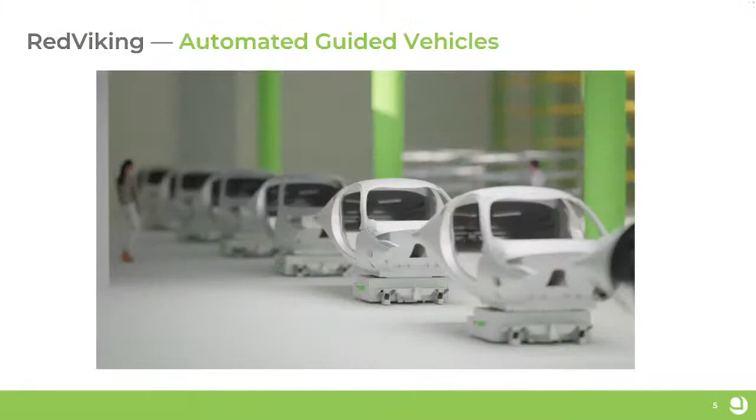Something that makes their products super unique is their automated guided vehicles that take our vehicles to be assembled around the factory floor to the different stations where they need to be assembled. They're basically robotic carts that the vehicle sits upon, and then it goes through our currently designed 12 stations to assemble an Aptera in just under 2 hours.

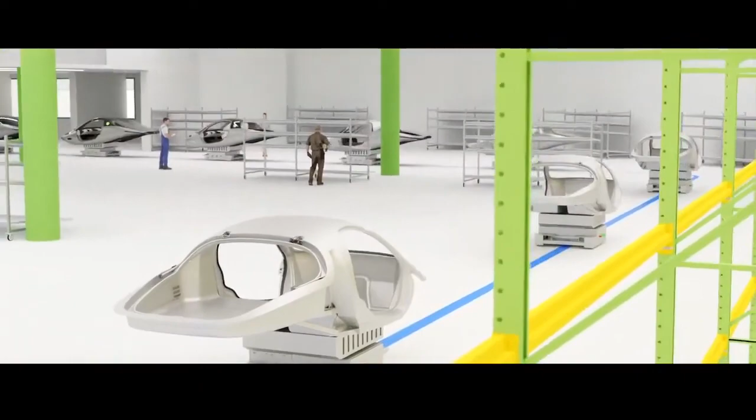But the cool thing about these robots is they can be programmed for different takt times. So in the beginning, if we're taking, say, 20 minutes per station, you can program the robots to move 20 minutes per station. And then as we speed up to 15 minutes to 10 minutes, the vehicles can just move faster.

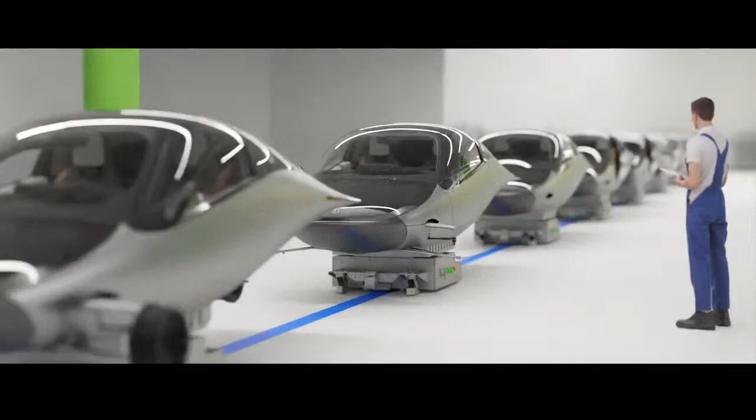And if there's a problem on the line, say a part gets installed wrong or a part ends up broken, you can have the robot take the vehicle off the assembly line, go over to a repair station, and when the vehicle's ready again, it can move it back in the queue to be ready for the next assembly operation. As we grow Aptera and have more Aptera variants, assembly times may vary between the variants.

As we get into maybe bigger or different vehicles, these carts are really adaptable over time. So it's not the traditional automotive plant that has overhead gantries that you have to install that cost millions and millions of dollars and aren't very flexible.

You've heard of factory changeovers in automotive past where it's taken a factory almost a year just to change over from one line to another. And that's because all of this equipment has to be installed, and it's very expensive and very cumbersome to uninstall and ramp up to a new and different kind of automotive line.

For us, it's really just changing the programming of the robots, how the robots move through the factory. So it's been an amazing relationship, and I think Pablo's been very happy about how the manufacturing floors come together with RedViking.

We actually, before we go into powertrain, have an exciting video to show you regarding the factory and the way that it will flow in the facility.

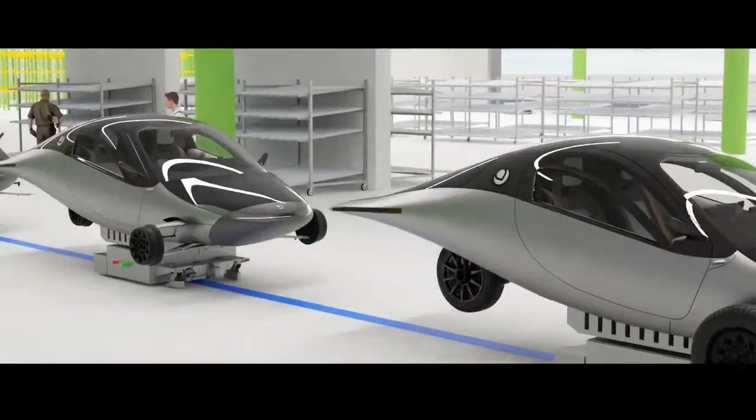We're back. Wonderful.

All right, as we're going through the different systems of the vehicle, Chris, would you like to talk about powertrain?

I would, and I'm sure Steve can chime in too. But we've had amazing progress with Elaphe Motors in Slovenia. Steve, myself, Akash, and Pablo traveled over to Italy and Slovenia and had an amazing trip with those guys. They are scaling their manufacturing capabilities to meet our production needs now, and they'll be delivering those motors from Slovenia to here in the U.S. for us to assemble these amazingly efficient motor packages.

I find myself having lots of meetings with investors and people interested in Aptera, describing this powertrain system and the power that it gives Aptera. It's just simplistic. The motor is in the wheel. You get rid of a centralized motor and a transaxle or a gearbox. You get rid of U-joints. You get rid of drive shafts. It's more aerodynamically efficient. It's more efficient at speed. It's just an amazing thing that makes the Aptera even more efficient.

And I think we're just so grateful to the team at Elaphe for helping us bring this to reality and bring this to the masses, because I think this technology will make the world a better place, because it'll make vehicles more efficient. So happy that arrangement has progressed nicely, and we're starting to push on all the gears.

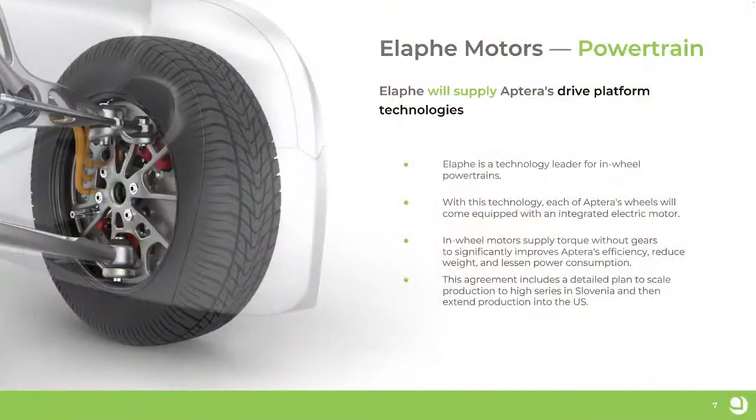They're buying equipment. They're rehabbing facilities. It's a joke, there's no gears. He said push all the gears.

So anything to add to that? Yeah, we made the introductions, but as Chris said, it's a team, right? It's Pablo and the engineers who are working with them to make it happen. One of the things I'm super excited that they're doing, besides modifying the motor to physically meet our needs, is the work that they're doing to make it more efficient with the windings and the shape and everything of the wire. And that's going to be a significant step function above where we are now in terms of the motor losses and efficiency. So I'm really excited to get these new motors.

Great. All right, another exciting area of advancement for us at Aptera, battery.

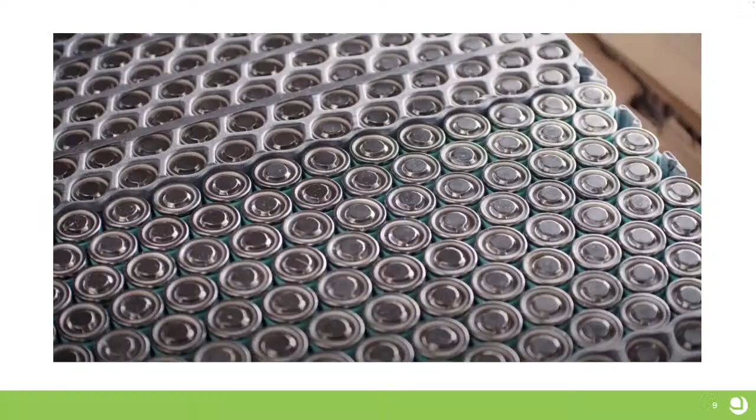Yeah, our battery team has been doing amazing things characterizing our 2170 cells, not just individually, but now as modules and a pack. It's been really cool to see the thermal characteristics of the pack design that we've come up with. It's just been amazing, and it's really cool to see kind of the equipment and processes come together to bring this pack to life.

It's amazingly energy dense, and our first pack design that you saw a video on a couple weeks ago, our 41 kilowatt hour pack, 45 kilowatt hour pack, 41 kilowatt usable, is just, it'll be an amazing first offering for us, and it'll be really cool to see those vehicles rolling around.

We will deliver the 41 kilowatt hour battery pack first, and then we'll deliver the 250 mile range, then we'll deliver the 600 mile range, and then we'll deliver the 1,000 mile range after that. So that's kind of the staging order of how we're delivering these battery packs.

That's exciting stuff. And an amazing relationship that we formed along the way designing this battery pack is with Eve Energy. They're going to be one of our battery cell suppliers. They've been very helpful in cell characterization over the last few months. And we've been making battery modules and packs with their cells that are going through validation now.

They're giving us 2170 NMC cells. The specific NMC chemistry is called 811, but if you do your research, it's a very energy dense chemistry that works perfectly for our needs and gets us tons of range and tons of energy density, and is kind of the latest and greatest in the battery world.

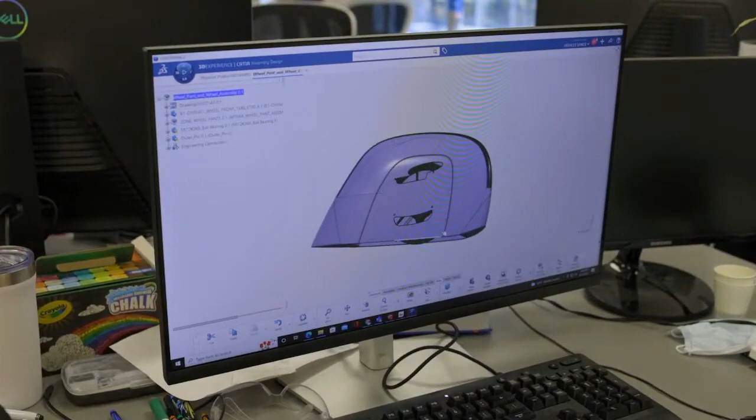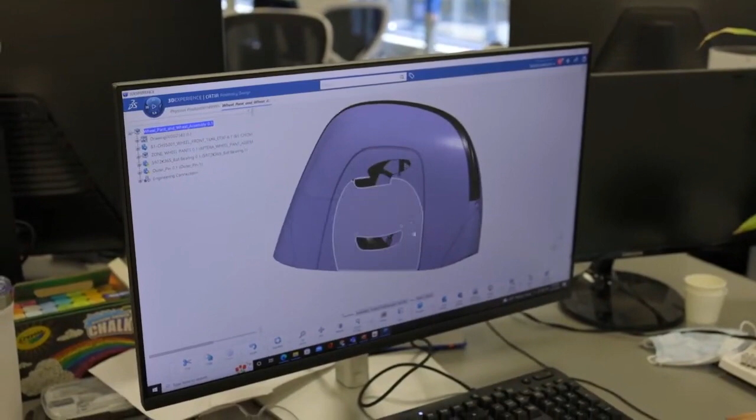Here you can see an updated CAD model of the wheel pant. At the front and back, 20 millimeter thick ethylene vinyl acetate foam bumpers allow it to take impacts. At the top is a plastic structured lens. On the inside is the plate that mounts to the spindle, and then a wheel pant in sheet molded carbon with an inner liner, permanently bonded together. And what happens when we go to simulate it?

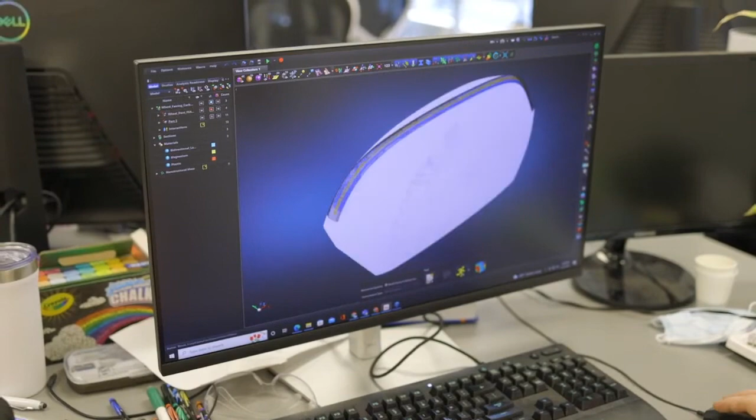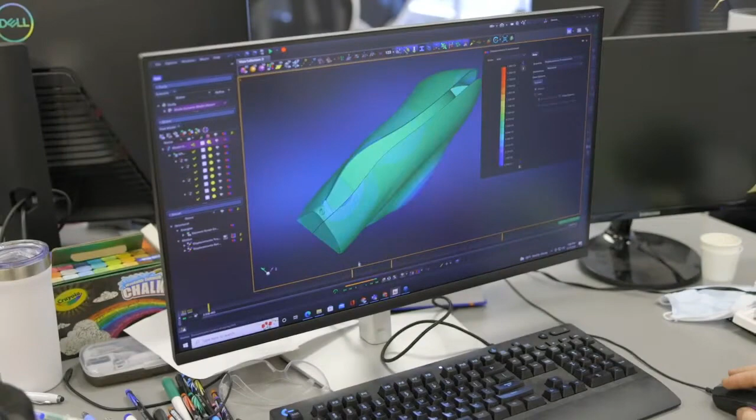Well, we have a model of approximately 800,000 elements, which when run with the SMC laminate and a plastic lens, gives the following modal results. This is equivalent to putting the component on a shaker table and allowing it to run at various frequencies until it shakes, giving you the resonant frequencies of it.

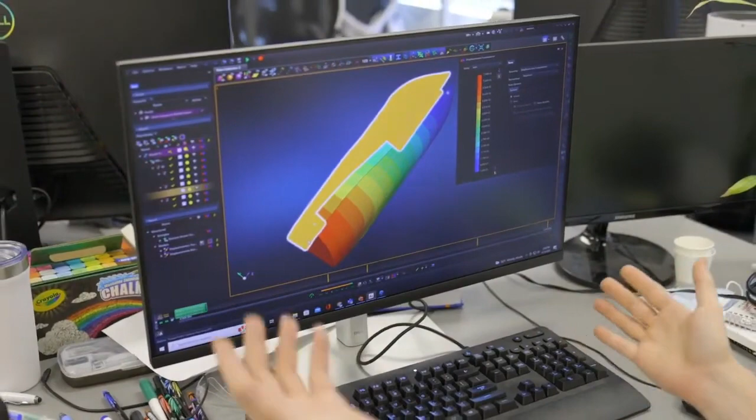The first few modes are trivial. Since it's unconstrained, it could drop or spin in any direction. The first non-trivial mode is the outer of the wheel pant bouncing in and out. This is restrained by the outboard bearing, but it occurs at 77 hertz, which is above the target.

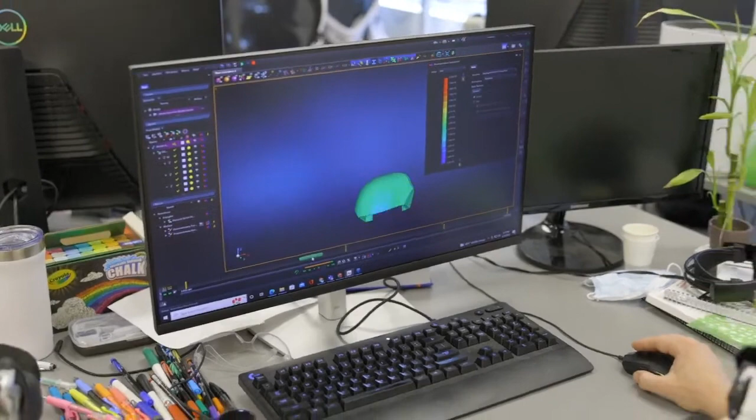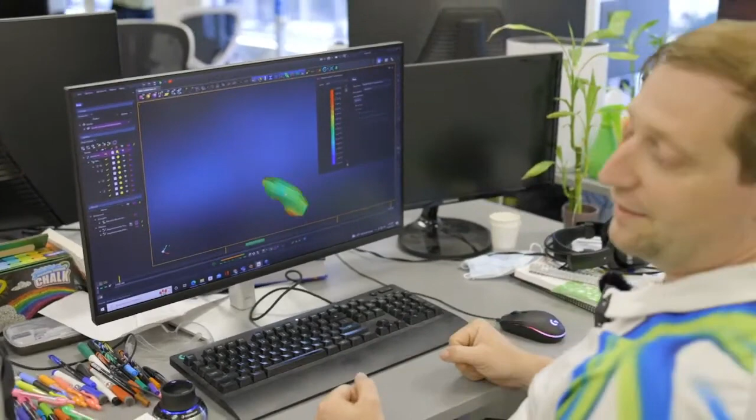Next you see the 100 hertz motion where the entire wheel pant is involved. This is effectively the first true resonant frequency of the part. If we could go about 225 miles per hour, we would run into this mode, but we're limited to 110.

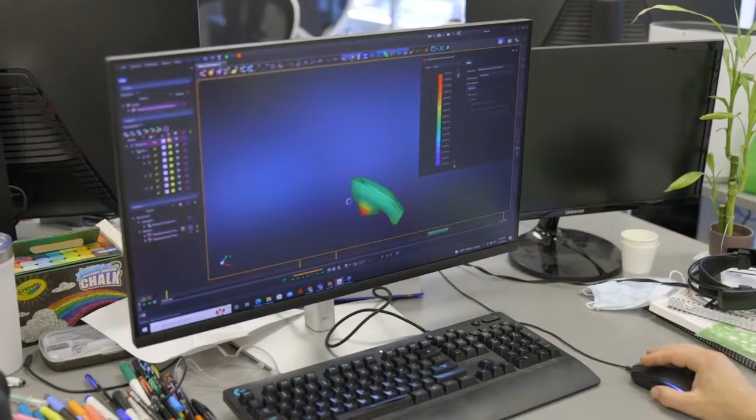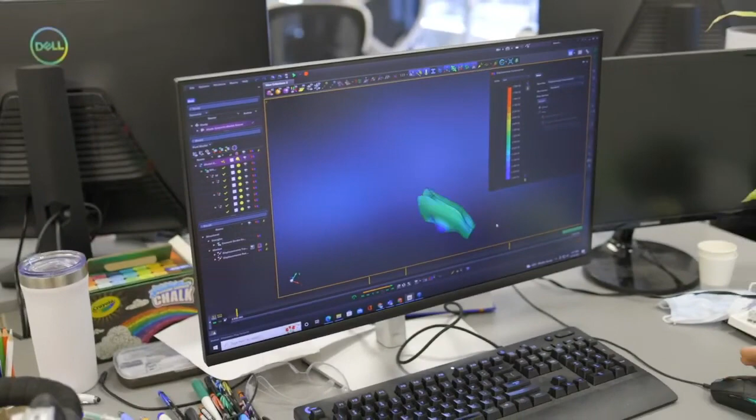So there's a considerable factor of safety as far as not having your entire wheel pant shake as you drive. The following modes beyond it are more local, with compression of the lens and the back, and a global mode where everything is vibrating, showing that this wheel pant meets the stiffness requirements we set out to meet, providing an experience where the aerodynamic shape of your wheel cover doesn't change and doesn't cause weird reflections in your view as it shakes.

I hope you enjoyed that, and in the next phase we will continue development on the lighting and on the mounting between the inner and outer, then proceed into prototyping, tests, and later production. Thank you.

Okay, now we'll pass it over to Steve Fambro to talk to us a little bit about body controls.

Thanks. By the way, some of the feedback from the live chat is, what are you guys drinking, cocktails and whiskey early in the morning? I assure you it's not. It's Celsius drinks, we're addicted to them, they make us very productive. Caffeine is key.

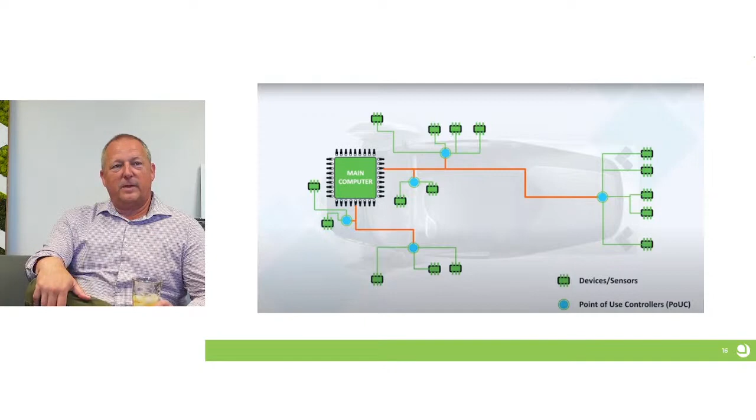One of the things Aptera is doing different with body controls and wiring is we're minimizing the amount of wiring the vehicle uses. We're able to do that through a unique architecture we've developed called the PoUC, Point of Use Controller. They're very small, low-cost, simple controllers that we sprinkle around the vehicle. They handle the loads of sensors, lights, switches, relays, and things like that locally, so we're not routing big wiring harnesses and lots of connectors all over the vehicle. The net result is the wiring harness is smaller, weighs less, and has fewer connectors and connection points, which helps us deliver on efficiency.

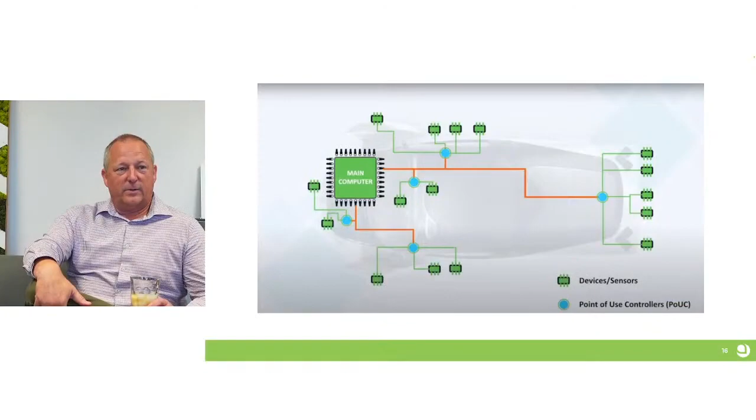I'm amazed at some of Sandy Munro's teardowns, where you see them pull the wiring harnesses out of some vehicles and you're like, oh my, that's a lot of copper. 90 plus pounds in some vehicles, and we can get it down to 30 pounds. That's an amazing weight savings.

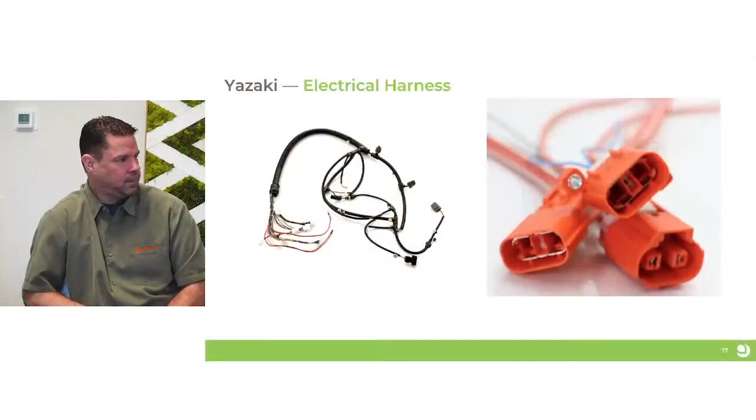One of the things we've announced a short while back is our relationship now with Yazaki. They're helping us with those newer, smaller wiring harnesses, to the extent that they've even got their engineers here embedded with us, helping us deliver on that promise and have these harnesses ready for production. Yazaki's in half of all new cars sold, so they're an amazing company with amazing reach, and it's very cool that they're willing to help us get this vehicle into production the right way on the wiring, harness, and connector side.

Thank you. And I believe we have JC to tell us a little bit more about how the electrical system in Aptera will work.

Oh yeah, awesome. Thanks, JC. So hi, I'm JC, I'm a firmware engineer here at Aptera, and I'm going to show you our low voltage test bench.

This bench basically represents all of the body controls that we have. Body controls are things like the window motors, the door latches, and different kinds of lights. This table is set up to enable us to program those components and watch how they interact with each other so we can debug and figure out how the system would work in the real vehicle.

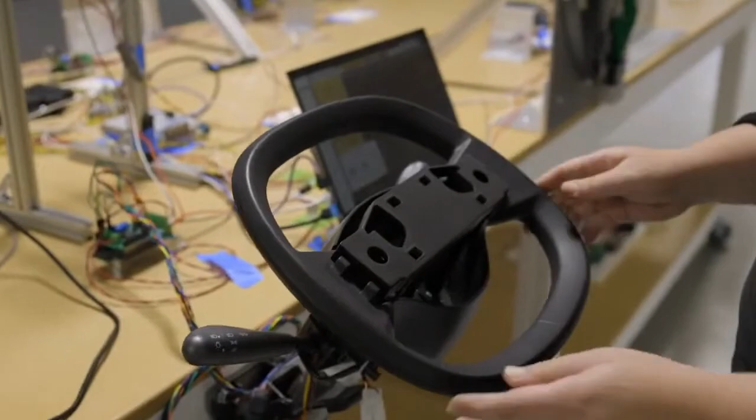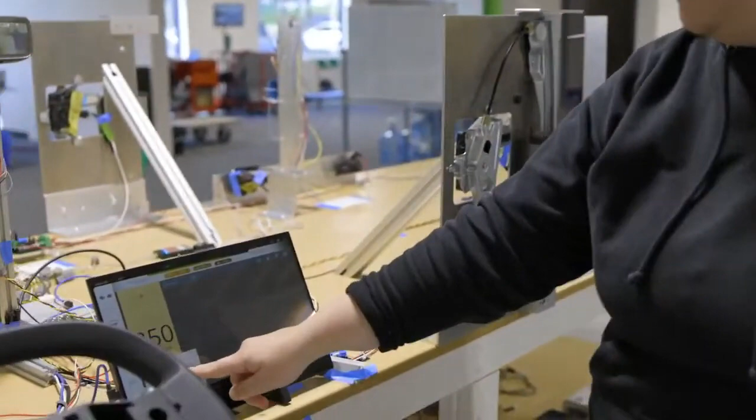Right now, this is where our wheel is, and above it you can see we have a rear view mirror with our video feed live from behind. We also have windows, well, fake windows with weights hooked up so we can test out the infotainment, where if you push up, the window should rise, and down, the window lowers.

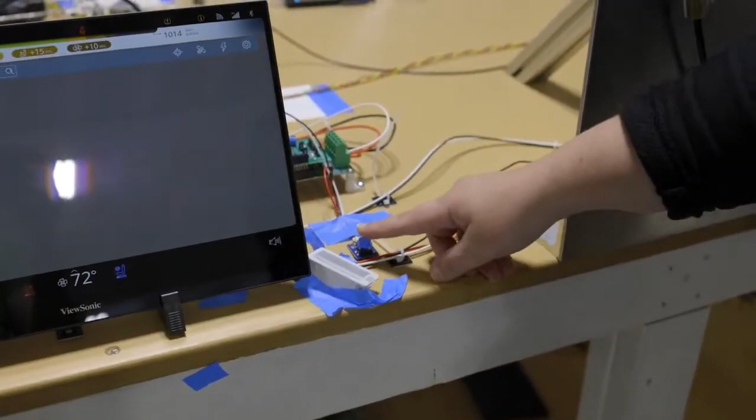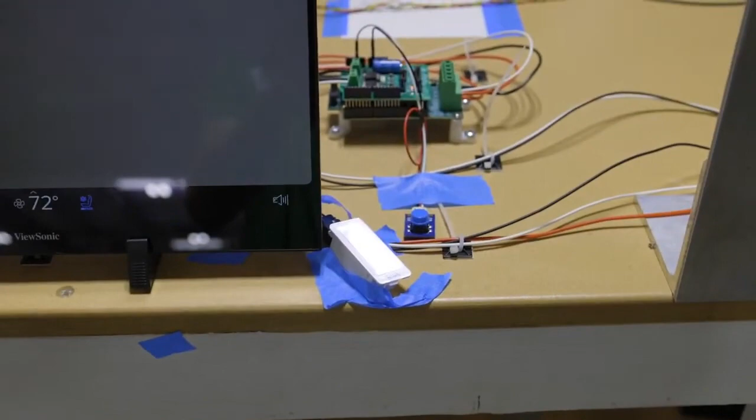This button simulates the button that would be in the vehicle to open your door, and when I press it, our left door latch opens all the way. When our left door latch opens, we get the wheel well lights that would be down at your feet when you're in the vehicle so that you can see where you're getting in. And then when I close the door, the lights will go off.

We also have the blinkers hooked up in the back of the vehicle so that we can test our signal patterns for turn signals, as well as test our hazard button lights.

We also have a pretty unique way of getting into the vehicle. We have two different methods for unlocking the door and getting in. The first method is an RFID card that you would have, where you pull it out of your pocket and then tap it against the door, and it will authenticate that it's you with the card and open the door for you.

We will also be having an app where you can authenticate who you are via Bluetooth. And then whenever you want to open the door of the vehicle, you can just walk up and knock on the B pillar twice.

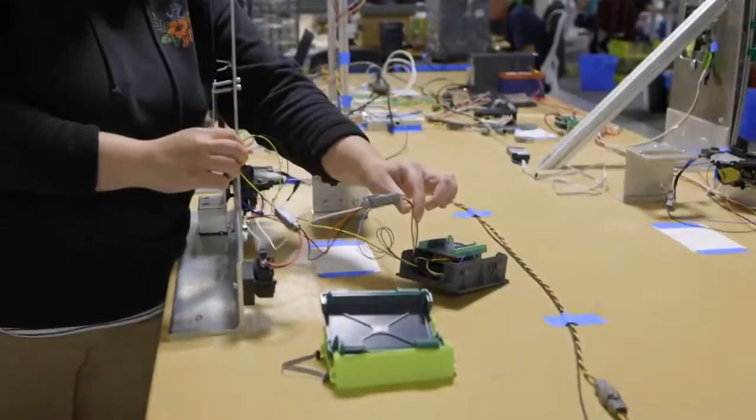The main goal of Aptera's body control design is to minimize the complexity of the wiring harness. In most vehicles, you would have all of the wires that you need for body controls, like the motor wires and the ajar sensor wires, and all of those would go towards a central computer. You have that from every single point on the vehicle, so you end up with quite a lot of wires.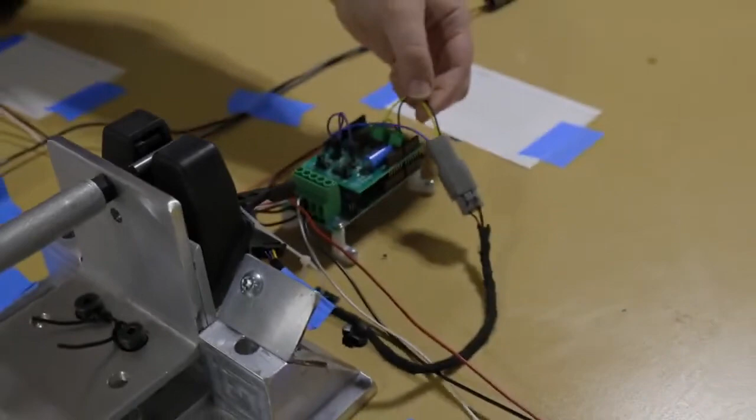With Aptera's design, we have smaller control boards that are located in the area of the controls they drive. So the door controller is going to be located in the door, and the rear hatch controller is going to be located in the rear hatch. This way, we can take all of these wires that come from the rear hatch, process and control them, and then we only have 3 wires total running from each location back to the central computing system.

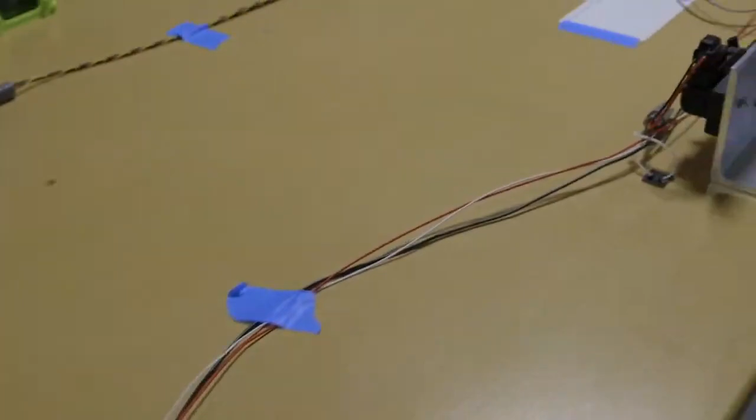Well, as you guys all know, the sun is Aptera's superpower. So to give us an update on solar, Steve. Thanks, Sarah.

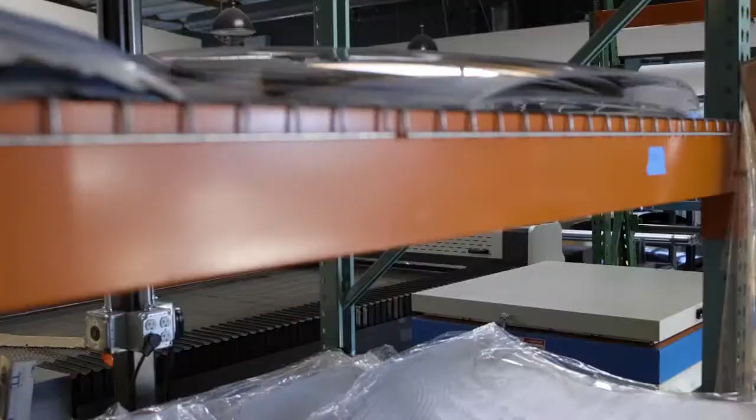When you're a solar electric vehicle company, it's not surprising that one of the largest parts of your technical endeavors is going to be solar. To that end, Anuj and his solar team is one of the largest single groups of engineers here at the company, and I think it's the largest single IP generating group. There's about 50 patents either filed or in play just with solar alone. We have in-house patent counsel who Anuj and his team keeps very busy. But they're also working with batteries and composites and suspension as well. Solar takes up the bulk of it.

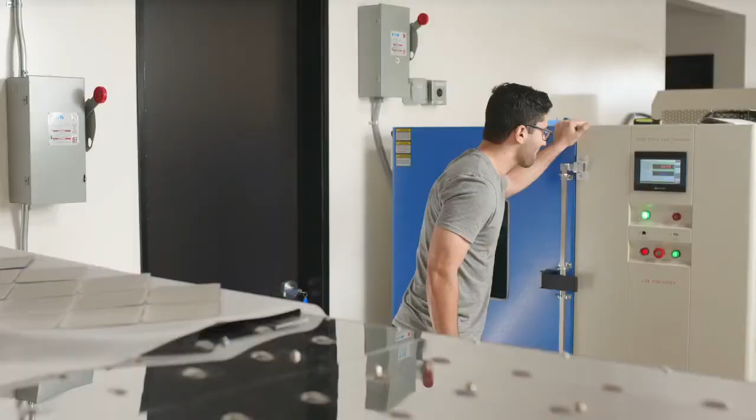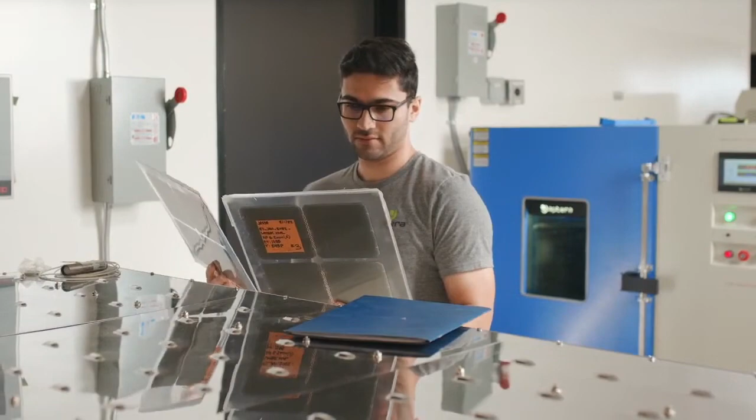It became apparent to us that it couldn't be a thing we simply thought of as an afterthought or did in any half measure. Rather, we realized early on that we had to go all in and double down on our ownership of solar, from working directly with the cell manufacturer to raw material suppliers all over the world, special test equipment manufacturers and equipment manufacturers to help us make these very unique compound curved solar panels.

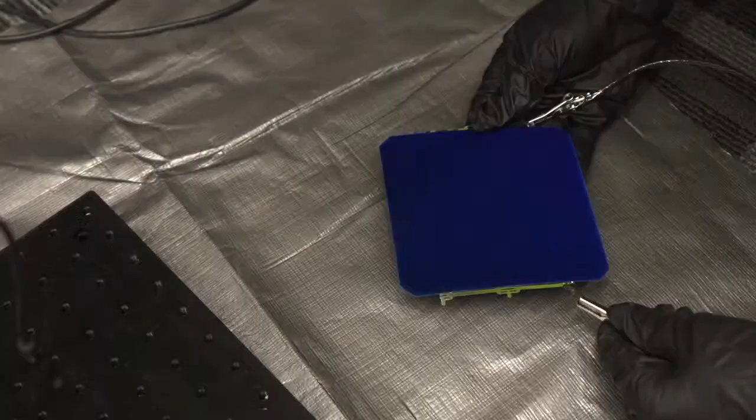Anuj had to build a team that could understand all of the material science and longevity issues that plague some other solar panels, and work to address those, and design an extremely lightweight, curvaceous panel that can have a 20-year lifespan. We have all the tools inside the company: test chambers, all kinds of solar torture equipment, from ice guns that they've made - apparently our team is good at making ice guns - to a simulated sun, which is a large 20-foot tower in an enclosed chamber, to a humidity and temperature chamber, to really simulate 20 years of life of the panels. We now have a very good understanding of what makes a reliable, productive panel, and that's what you're going to be getting in your solar-powered EV.

I think Anuj has some video for us. He does. Okay, it was playing the whole time. Oh, okay, good. All right.

All right, what did you guys think of our video? Solar is a big part of the company, and there couldn't be any other way to do it. I think it's amazing to note that when we first started testing the first solar panel 2.5 years ago or so, we kind of put it in vehicle configuration to try to figure out how much energy we would create.

We looked at that and thought, okay, hopefully we can find somebody to build these solar panels for us. We learned very quickly that even the best solar experts in the world weren't going to be much help in making automotive grade solar panels. So we started very early on with Anuj and his team, knowing we've got to own this challenge and make the world's first automotive grade solar technology.

It all begins with a focus on aerodynamics. As Aptera gracefully pierces the air with its curved nose, wide body, and tapered trunk, it uses less than a quarter of the energy of the average EV on the road today. While our unique shape may seem like a design statement to some, this is no accident. Our ethos of continuous improvement has pushed us to constantly refine the shape of the Aptera to reduce the force of air flowing around our vehicle while in motion.

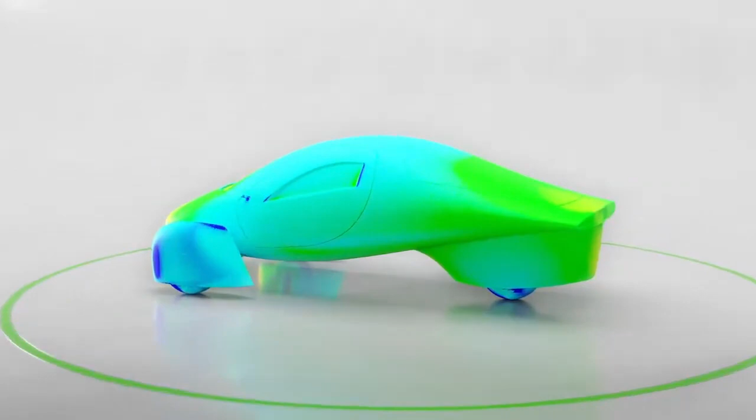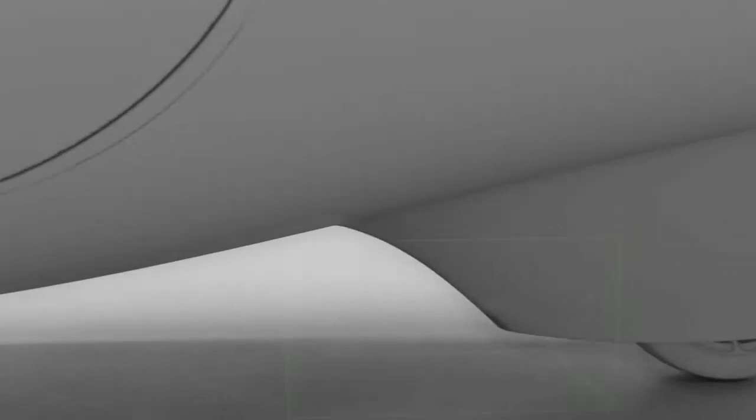This has been done with aerodynamic iterations from our talented Aptera team, alongside tools provided by AirShaper's Aerodynamic Shape Optimization platform. First, we adjusted the shape of our front wheel covers to align with the natural airflow pattern around the nose and main body of the vehicle. Next, we focused on the rear wheel skirt, shaping it to aim the air downward and away from the rear tire, so that a process called pressure recovery can occur as the airflow pushes the Aptera forward, like it's squeezing a wedge with the sides of our rear wheel skirt.

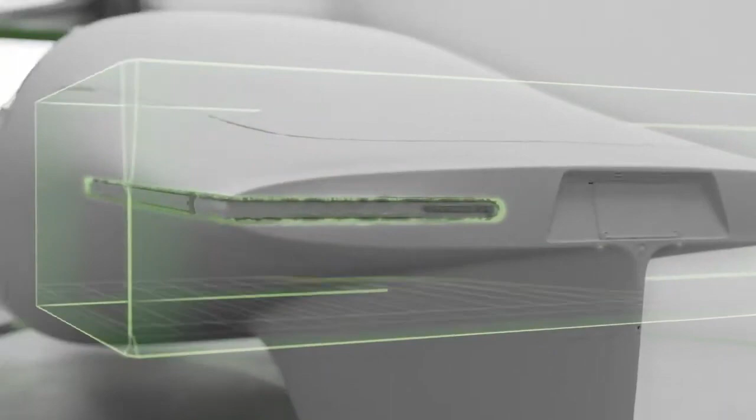Lastly, by reducing the thickness of our tail, we reduce the wake behind the Aptera, so it literally drags much less air along with it. All of these ultra aerodynamic updates mean the Aptera can achieve the greatest level of efficiency, refueling from the sun as it drives. With our dedication to continuous improvement in all areas of vehicle engineering, we're eager to find new ways to reinvent transportation. We hope you'll support our efforts at aptera.us.

All right, that was a super cool video. Chris, do you want to tell us a little bit about what we saw there?

Yeah, I hope everyone enjoyed that super sexy video. It's amazing to see the transition from alpha to gamma, and it was really a lot of work from our dedicated team here to refine and massage the shape. It's just amazing the computational tools we have at our disposal. We can do full aerodynamic simulations for the whole vehicle now in like four hours, and some of those generative design studies overnight. So it's really cool to tackle an aerodynamic problem, have your own ideas on how you think it might be solved, and then have the computer tell you no, that's not how you're going to solve this problem.

This is how you're going to solve this problem. So I think it's great to have artificial intelligence telling us how to make this the most aerodynamic shape possible, and it's shaved a lot of energy usage out of our equation.

We actually grew the body by 1% to make it bigger for the passengers. We have more headroom, more interior room. But we actually decreased the total drag coefficient of the vehicle several percent because we've been able to go through this drastic optimization cycle to make this better. I think we'll continue to do that until production, and we'll shave every little bit of aerodynamic drag out of the equation we can.

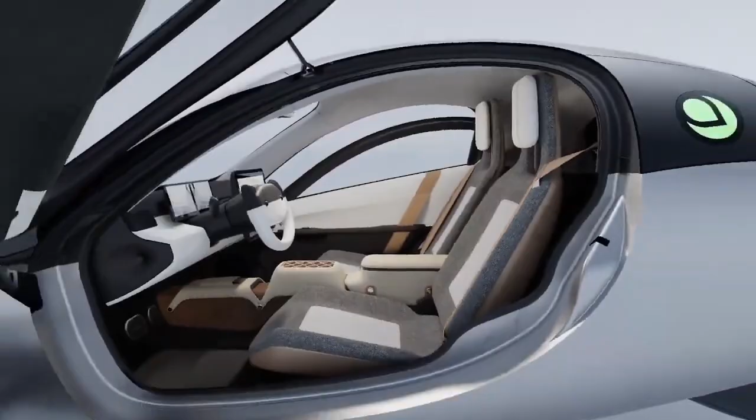Okay. I'll get that working for you. Okay, thank you. All right.

Okay, Jason, I think we're going to go through the interior. The center of your world when you're in Aptera - could you walk us through what that experience is going to be like for drivers?

Sure. So the whole starting point for Aptera, inclusive of our aerodynamic product, is our user space, which is basically the cabin of the vehicle. We've endeavored to give a unique experience that is commensurate with the unique outside. The interior has to be executed in a similar way. So we looked at what are the essential needs: comfort, safety, material experience, fit, finish, feel. And these all came together in what you're seeing now.

And again, we're going to have a physical representation of this within about 4 short weeks. I'll start with the seating position. We've optimized the cabin to increase the space. As Chris mentioned, we grew the body about 1%. We've optimized for ergonomics and reach envelopes. We've got the right H points, which is where your hips are, and the right reach envelopes to the steering wheel, to the center screen.

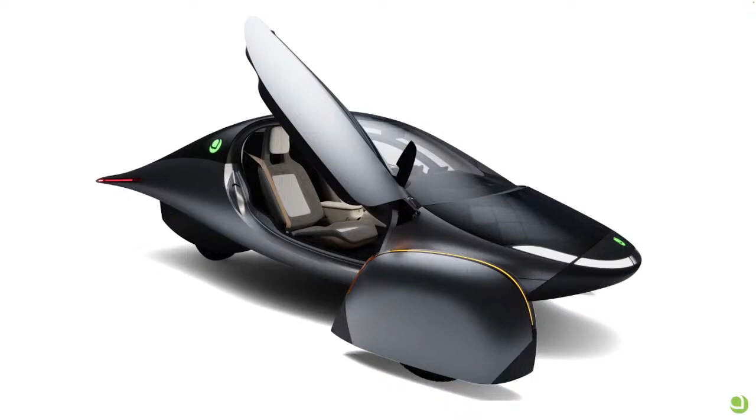Exciting. And the exterior has evolved. We've developed our lighting systems, and they've come a long way. We've got something in the works to share with everybody about the headlamp and our signature lamp. We actually have a demo version of it, and we'll be able to share that fairly soon.

Chris again talked about the AirShaper, and we've iteratively improved our aerodynamics. We look forward to the final drag product as we go through what we normally call the body in white, but we're going to have a little bit of a change in that, and a little bit of a surprise.

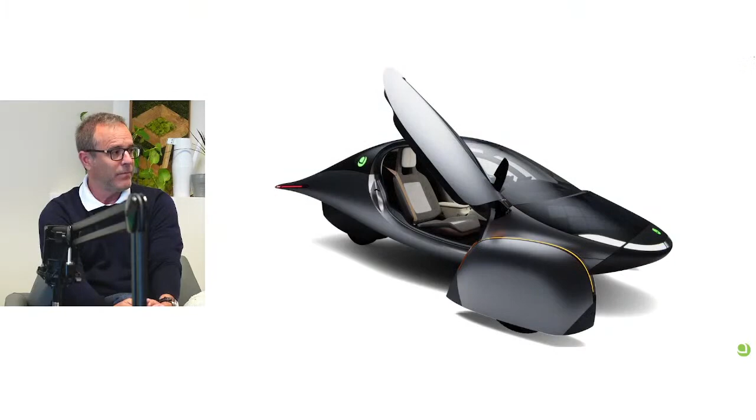In about a month's time, we're going to talk about what this vehicle means and how we put it together, and what that's done. But what you're seeing right now is exactly what we're building. What you see is what you get for next month, and we'll have a really good chance for everybody to say, oh, I see that. That's way better than Alpha.

We're in a unique position as far as our original prototypes. We did great endeavors, but our product will be better than our show vehicle.

I do want to point out, maybe to the eagle-eyed observer, that there seems to be an extra 4 solar cells on the hood. Seems like you and Anuj had a little fight, and Anuj won. Anuj is a worthy opponent, he is wonderful. Anuj and I, actually, this is the privilege of design when you're working with engineering.

You have a chance to battle towards two places to win, or two ways to win. And we've added more solar cells on both the hood, for the eagle-eyed viewer as Chris pointed out, and also in other areas on the vehicle. But we're improving our ability to add the solar, which will then just help us overall.

Very cool to see it evolve. It's just beautiful, that's all I can say. We get that a lot. Thank you, Chris. Yep, lots of exciting stuff to come.

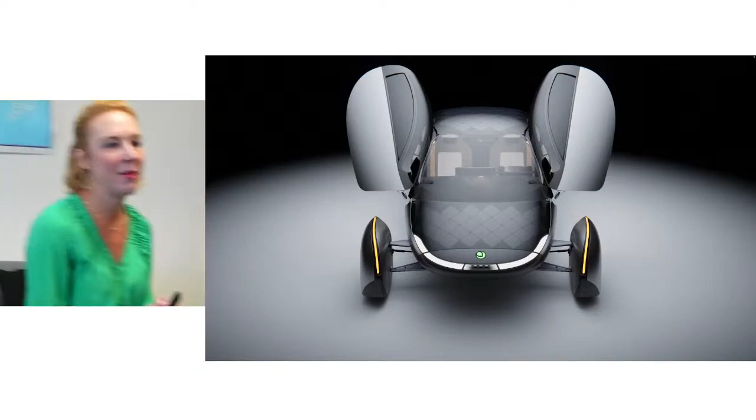As you can see from the team at Aptera over the coming months, we're getting closer and closer to our goal of reaching production, and we look forward to bringing you all along with us as we go on our journey. We do have one extremely exciting piece of news.

It's actually breaking, kind of happening in real time. We wanted to share with you guys. The timing is great. We actually have announced, just in the last few minutes, that we have exceeded 25,000 orders for Aptera, which is a huge milestone for us.

All of our team, all of our engineers who have worked such long hours and weekends, the dream has become a reality. It's really exciting for us to be a part of that, and we're very, very thankful for all of you being a part of that journey with us as well. So, very exciting news. We'll be celebrating over the next day or two, but we wanted you guys to be the first to know. We couldn't be more proud.

I think it's an amazing milestone, and it's happened much quicker than I think many people would expect. You look at us compared to the industry, and I think a lot of people would say electric pickup trucks, electric luxury sedans, electric SUVs - that's the hot spot of the EV world, that's where all the action's happening, that's where all the interest is. That's not true from what we found, because our pre-orders have accelerated at a pace far faster than any other comparable EV startup we can find.

We feel that the energy is not with these bigger, more energy-consuming vehicles, but people are expressing their interest in efficiency and solar power, and that's why we're at 25,000. It's an amazing compliment to the team and the vision, and I think it bodes very well for our future.